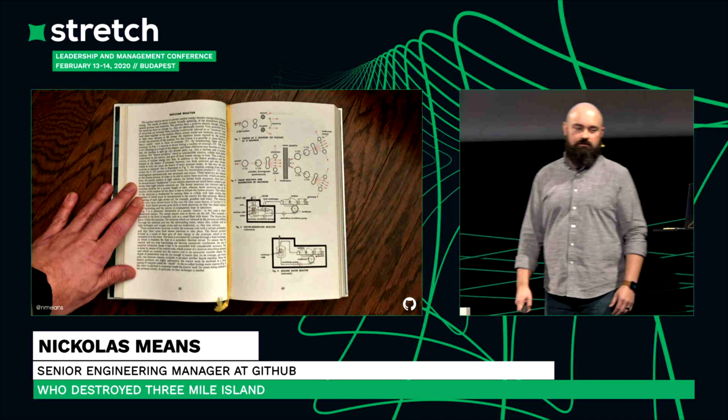I don't look at them very often these days, thanks to the wonders of the internet and Wikipedia, but they still have a treasured place on my bookcase because they're a big part of what made me who I am today. I distinctly remember turning to them when it was all over the news that a new nuclear power station had opened near the town where I grew up when I was a kid. I had no idea how a nuclear reactor made electricity, and I wanted to know. And I think that same diagram I looked at back then is a great place for us to start today.

As it turns out, the basic mechanics of a nuclear power plant really aren't that different from any other steam-driven power plant. There's a heat source that heats up water. Now, in a normal steam power plant, that would be burning coal or burning natural gas or burning oil. But in this case, it's a carefully controlled nuclear chain reaction fueled by uranium. High-pressure water circulating through the reactor carries that heat from the reactor core to a steam generator where it's used to boil water, converting it into steam.

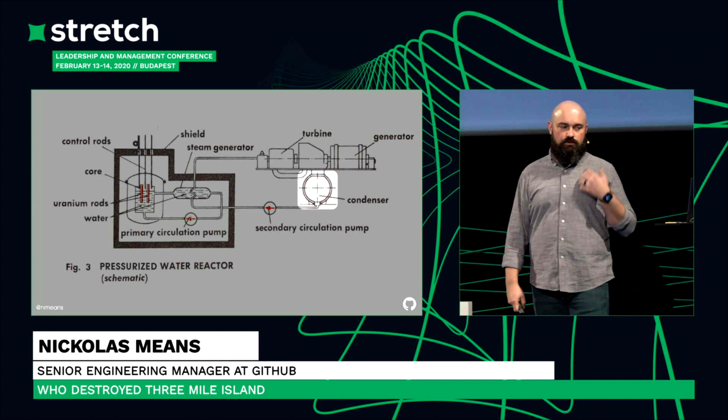And then when water turns to steam, it expands. And that expansion drives a turbine, which is basically a giant fan in a tube. The turbine turns a generator, and that's where you get your electricity. Then the steam is pumped into a condenser where it's turned back into water for another trip around the loop.

Now, there are 2 primary families of nuclear power reactors operating in the United States, the boiling water reactor and the pressurized water reactor. We're looking at a pressurized water reactor because that's the kind that was operating at Three Mile Island the day of the accident. So what is it about this design that makes it a pressurized water reactor? Well, the components that I just walked you through are on 2 separate loops.

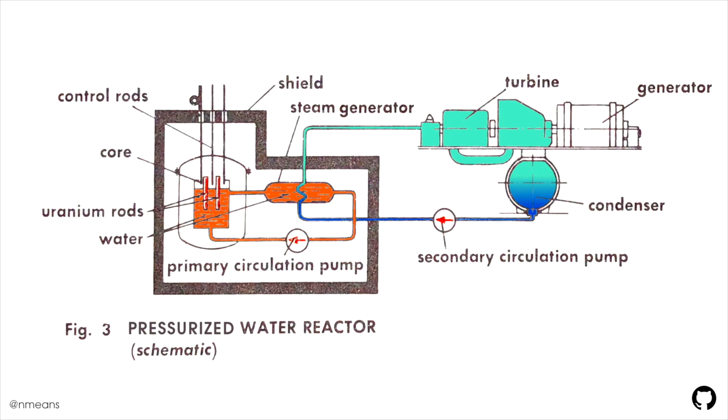The primary loop in orange consists of the water that flows through the reactor vessel, gathering heat, passing through the steam generator and boiling water in the secondary loop, passing that heat off and then going back into the reactor itself. The water in the secondary loop in blue flows from the steam generator, where it boils to steam, through the turbine, through the generator, back through the condenser to turn back into water, and around and around.

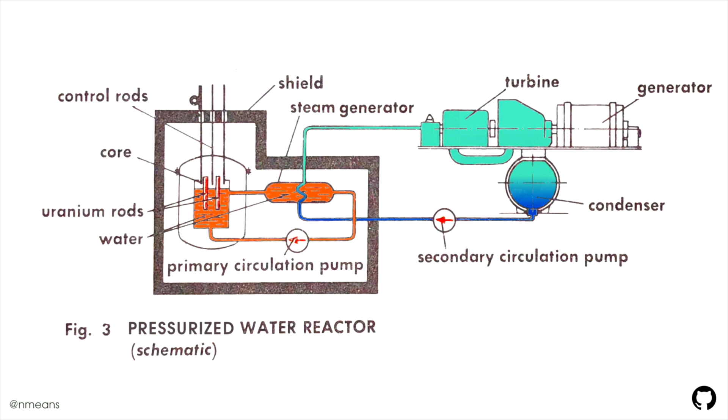And water from the 2 loops never mix. One of the advantages of this is that you have the nuclear portion of the plant really tightly contained in the primary loop, and the secondary loop should never have any exposure to nuclear energy. The thing that makes this design a pressurized water reactor is that the water in the primary coolant loop is held at about 2,000 pounds per square inch.

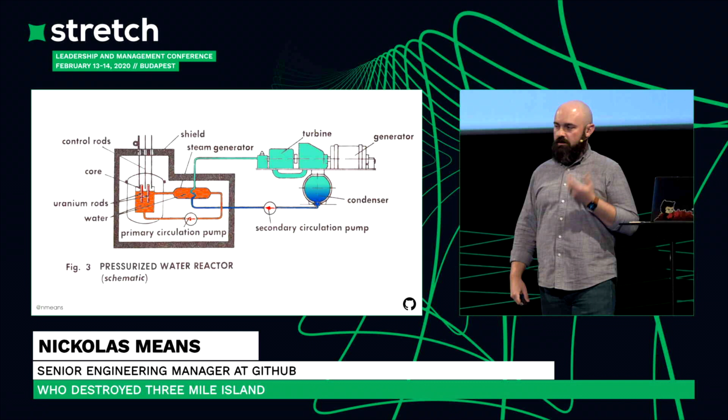A boiling water reactor has to have a very large reactor vessel to allow the water to boil and expand in the reactor vessel, but a reactor vessel of a pressurized water reactor can be much smaller. And the reason for this is that pressurizing water raises the boiling point. And it raises the boiling point high enough that the water in the primary loop will never boil, even at the plant's operating temperature of about 315 degrees Celsius. Or at least it shouldn't.

Which brings us to March 28, 1979. 3 Mile Island Nuclear Generating Station is a 2-unit nuclear power plant in Londonderry Township, Pennsylvania. It's built on a 3-mile-long sandbar, imaginatively named 3 Mile Island, in the Susquehanna River, about 10 miles south of the capital of Pennsylvania, Harrisburg.

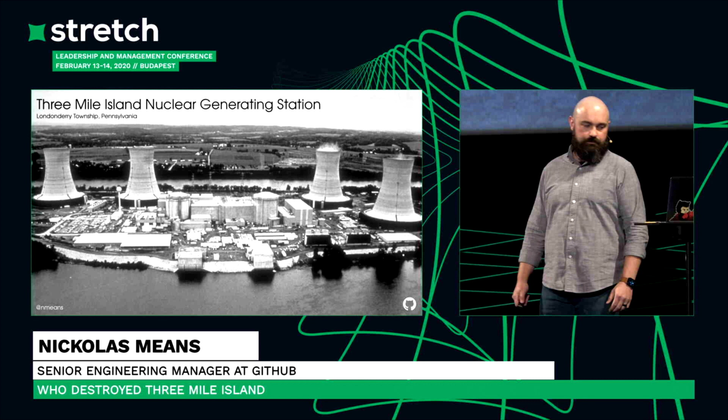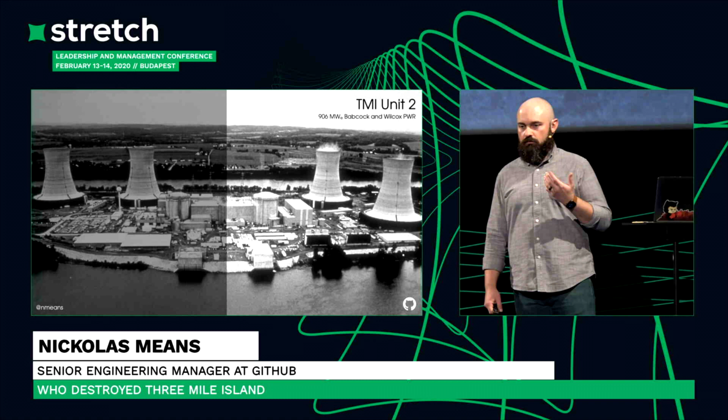Unit 2 is a 906-megawatt electric pressurized water reactor designed by Babcock and Wilcox that went into commercial operation on December 30th, 1978. Now, early in the morning of March 28th, 1979, it's running at 97% capacity, and it has been since it went online. It's running hot, straight, and normal, as they say in the nuclear power industry.

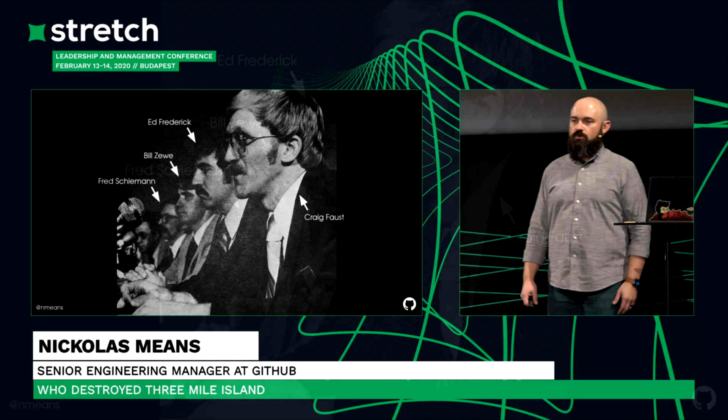Everything at the plant was normal that night. Everything was running exactly as it should, except for a small problem in one of the condensate polishers that the previous shift wasn't able to solve. And these are condensate polishers, obviously not the ones actually from 3 Mile Island. It turns out it's really hard to get a photo of a specific component of a specific nuclear power plant, as you might expect. But this is what they look like. These are condensate polishers. And these are tanks that are filled with resin beads. And 3 Mile Island has 8 of them.

And the purpose of these resin beads is to filter the water coming out of the condenser before it goes back into the steam generator. The steam generators are made up of thousands of tiny tubes, and the tiniest speck of rust or dirt or anything in that coolant loop can clog the steam generator, and eventually you would have to replace the steam generator when it gets clogged enough. So to combat this, they have these condensate polishers. The water flows through them, any impurities in the water stick to these resin beads.

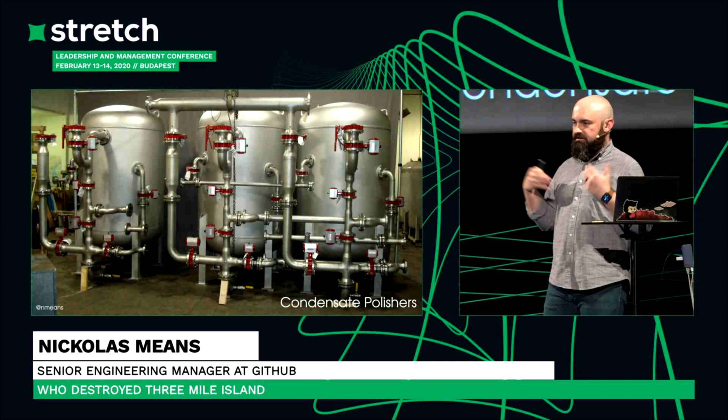The only problem is that the condensate polishers like to get stuck because they like to get clogged because of all of this stuff that they're collecting. And so every so often, one of these condensate polishers would get clogged and they would have to backwash it, essentially reverse the flow of water through the filter to rinse all of that stuff out and into the waste tank.

This particular night, the number 7 tank is completely clogged, and the swing shift had tried to unclog it. They'd used the backwash system. They'd even hooked up an auxiliary air system to try to force this clog through and get this tank moving again. So at 3:59 in the morning, Fred Scheimann is down in the basement of the turbine hall to see how things are coming with this clog.

He's climbed up on the side of the number 7 tank, and he's peering in the viewing port to see if there's any water flowing through it, when things get incredibly silent. Now, he's in a room where millions of gallons of water per hour flow through, so things getting quiet is not a good sign. And he barely jumps free before a water hammer comes through and knocks the feed line from its moorings.

What's happened is over the course of about 10 hours or so, water has leaked back up this pressurized air line through a leaking one-way check valve, because the air supply that they were using to clear this clog in the condensate polishers was the same air supply that controlled the valves for the condensate polishers. And these are fail-safe valves. So when the water finally got up to the manifold that supplied air to all of these valves, it blocked the air supply and all 8 valves shut simultaneously.

Obviously, this is not good. But to help us understand why, here's a schematic of 3 Mile Island Unit 2. Now, I know this looks a whole lot more complicated than the diagram I showed you a minute ago, but it's got all the same parts. So let me take a second to get you oriented. For starters, you can see the primary coolant loop here in orange and the secondary loop in shades of blue.

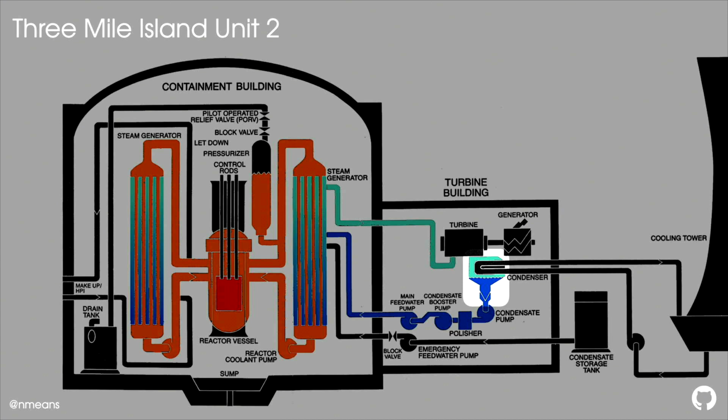Here in the center is the reactor vessel where the nuclear chain reaction creates heat. Next to it are the 2 steam generators where heat from the primary loop boils water in the secondary loop to create steam. This is a 2-loop pressurized water reactor, and so that means it's got 2 redundant steam generators. The steam is then piped to the turbine building to turn the turbine and generator. And then here's the condenser where the steam gets cooled and turns back into water. And then right after the condenser is the condensate polisher. And it's completely blocked.

Now, because the condensate polisher is blocked, there's no water to be pumped through the secondary cooling loop. So the main feed water pumps trip offline. It's now 36 seconds past 4 in the morning, the official start of the accident. 2 seconds after the main feed water pumps trip, the turbine senses it's not going to be getting any more steam, and so the turbine and generator trip offline as well. And this causes the plant's main safeties to open. So all of the steam that's built up in the system gets vented into the night sky at 4 in the morning. And they said you could hear the rumble for miles.

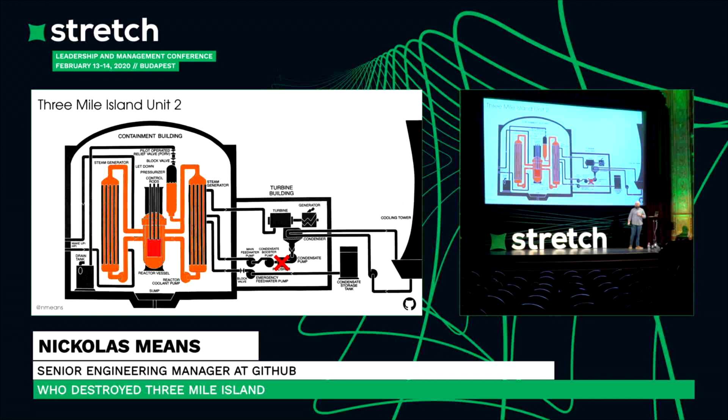In the control room, Ed Frederick and Craig Faust are getting their first indications that something has gone awry. An alarm horn announcing the turbine trip starts going off, and several alarm indicators start to flash. A few seconds after the turbine and generator alarms go off, the pressure in the reactor vessel begins to climb rapidly. But this pressure spike is expected, because without the secondary cooling loop to remove heat, the primary loop climbs in temperature, and when water climbs in temperature, it expands, and this raises the pressure of the primary loop. The good news is, the plant is designed for exactly this situation, and it was taking action to resolve the situation automatically as soon as those first alarms went off.

The reactor's pressure control system is the first to jump into action. Now, there are 2 components to this system, and both of them are important to the accident sequence. The first one we're going to talk about is the pressurizer. Now, the pressurizer in a pressurized nuclear power plant serves a few different functions. First, it regulates system pressure. It's the highest point in a closed system, so raising the pressure of the pressurizer raises the pressure of the whole system. Lowering it lowers the pressure.

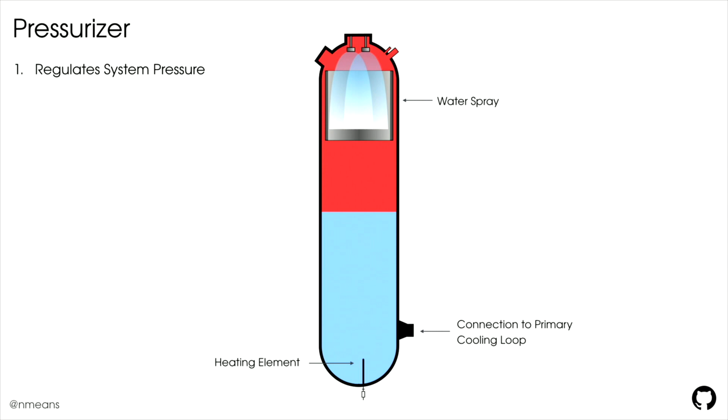Second, it measures the water level. When they designed this plant, they made a decision to save money to not put any water level instrumentation directly in the reactor vessel. And the reason they did this is because it's very expensive to design instrumentation that's going to be accurate in such a high nuclear activity field. And so they said, because we've got this pressurizer sitting here, we can measure the water level in the reactor vessel just by checking the pressurizer. As long as there's water in the pressurizer, there has to be water in the reactor vessel.

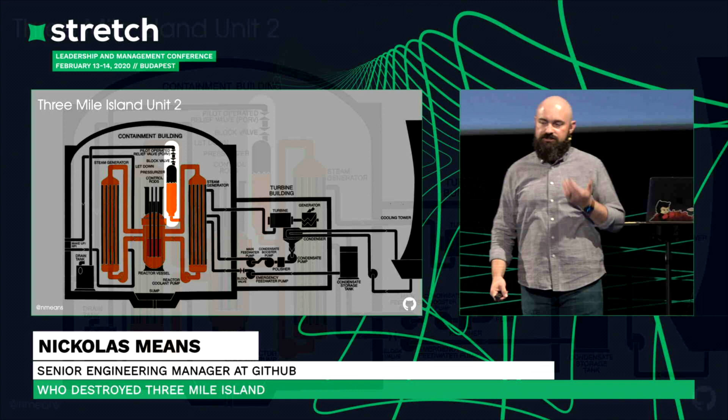And third, because steam is more compressible than liquid water, it serves as a shock absorber. The steam in the top of the pressurizer absorbs any pressure transients in the system, just like the one Unit 2 is experiencing right now. So the steam in the pressurizer absorbs the initial shock, but the pressurizer itself is really only designed for small pressure adjustments. Right now, the primary cooling loop is at 2,250 psi and climbing, about 100 psi higher than it should be.

And it would take the pressurizer several minutes to make this large of an adjustment. So what does the system do about big pressure changes like this one? Well, that's where the pilot-operated relief valve comes in. And if you've ever heard anything at all about Three Mile Island Unit 2, this is the component that you'll remember the name of, because this is the most important component in the accident sequence.

In the event of a big pressure spike, the pilot-operated relief valve will open and release coolant into a drain tank on the containment building floor. This is to immediately and quickly release pressure in the system. The pilot-operated relief valve opens 3 seconds after the turbine and generator trip offline. The reactor control system is doing exactly what it's supposed to keep the reactor in a safe operational state.

A few seconds later, the computer senses that reactor pressure is still continuing to rise despite the pilot-operated relief valve being open, so it takes another defensive action. It scrams the reactor. Now, to understand what a scram is, we have to know a little bit about what's going on in the core of a nuclear reactor, how it generates heat.

So the core of a nuclear reactor is full of uranium, and there are a bunch of neutrons flying around. And every time one of those neutrons hits a uranium atom, it causes it to split. When that uranium atom splits, it releases more neutrons and a copious amount of heat. The neutrons that are released there go and bump into other uranium atoms, and that's why it's a nuclear chain reaction.

Well, the primary means of controlling the intensity of this reaction is a set of cadmium control rods that can be gently raised or lowered into the core of the reactor. And the cadmium control rods absorb some amount of those neutrons that are flying around and slow down the reaction.

A scram is the reactor's emergency stop. Instead of being gradually put into the core of the reactor, the control rods are released from the mechanism that raises and lowers them and are allowed to fall by gravity into the core of the reactor. And once they're all the way in, they stop the chain reaction almost instantly.

The thing you have to know, though, is that even after the scram, the reactor core is still producing some amount of heat. Even though there's no ongoing chain reaction, it's still producing about 6.5% of the heat that it was producing running at full tilt. That descends sharply over the first hour, but it's critical that the core is kept cool for this first hour to avoid damaging the core.

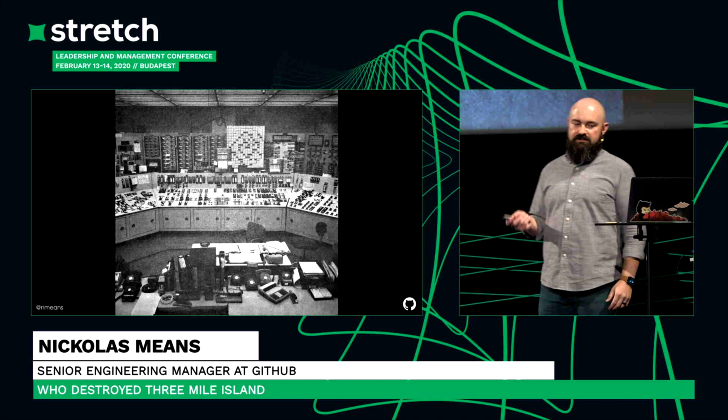A few seconds later, back in the control room, a light on the console turns from red to green to indicate that the pilot-operated relief valve has been signaled to close. Now, at this point, everything feels very much under control. Reactor and turbine trips aren't an everyday occurrence, otherwise the plant couldn't generate electricity. But they're an event that the reactor crew is trained for. They know exactly how to respond to it. This is not out of their expertise.

The alarm horns are blaring, alarm indicators are flashing, but the system is behaving exactly as it's designed. That feeling of control would last exactly 2 minutes. Because 2 minutes later, Ed Frederick and Craig Faust's world is thrown into chaos when the automatic emergency core cooling system activates, specifically the high-pressure injection system. And when it turns on, it begins dumping 1,000 gallons per minute of cold water directly into the reactor core.

Now, this was very unexpected and confusing to Bill Zewe and his crew. The plant had gone from a state they understood to one they very much didn't as soon as high-pressure injection kicked in. And here's why it was so confusing to them. They were watching the pressurizer, and water level in the pressurizer was rising. Seeing the water level in the pressurizer rise told them that there was plenty of water in the system, so they didn't understand why high-pressure injection would need to be adding more water to the reactor core.

And so, Fred Scheimann made the call to turn off the emergency core cooling system, to deactivate high-pressure injection after it had only been running for 2.5 minutes. Had he not, had he left high-pressure injection running, this accident would have been completely avoided. The plant would have been saved. But he didn't. We're now 5 minutes into the accident.

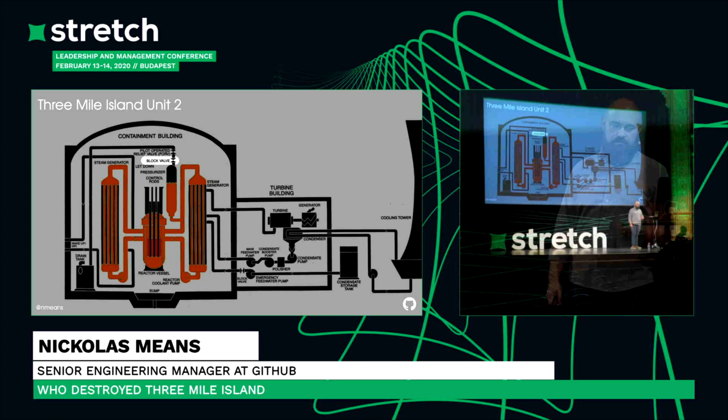Now, had Bill Zewe closed the block valve, had he followed procedure, this incident would have been a minor inconvenience. The accident sequence wouldn't have continued. But he doesn't. He leaves the block valve open. We're now 6 minutes in.

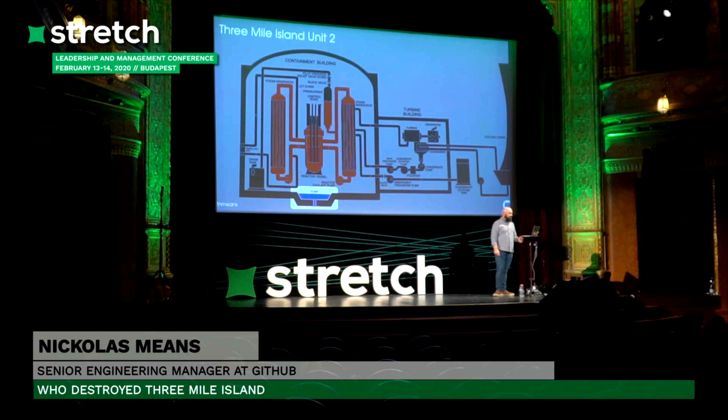5 minutes later, at 4:11 in the morning, another alarm goes off. This one indicates that the sump is filling up. And the sump is a pit in the floor that collects any water that might leak or be vented anywhere in the system. There's potential that any water vented from a nuclear reactor obviously has some nuclear contamination, so they have to check it and clean it before they can dispose of this water.

In this case, what's happening is that so much water has been released from the primary coolant loop that it has filled the drain tank on the floor of the containment building, and the drain tank has started overflowing into the sump. Now, enough water in the sump to fill it up is a very clear indication that the system has a substantial leak, but the operating crew ignore it. The core is in serious trouble at this point, but the operators are not done.

Just after 5 in the morning, the floor of the control room starts to rumble. It's subtle at first, but it quickly becomes impossible to ignore. What's happening is the primary coolant pumps of the reactor are vibrating because they're pushing around steam in addition to the water that they were designed to pump. And that steam is causing significant turbulence and vibration.

Now, they know what their training says to do when this happens. In order to keep the very large, very expensive pumps from vibrating themselves to pieces or causing a coolant leak, they're supposed to shut them down. Now, they hold off doing this as long as they can, but 15 minutes in, Bill Zewe and his crew can stand it no longer, so they shut off the first set of pumps. This helps for a while, but 30 minutes later, the vibration grows so intense that they close the other set.

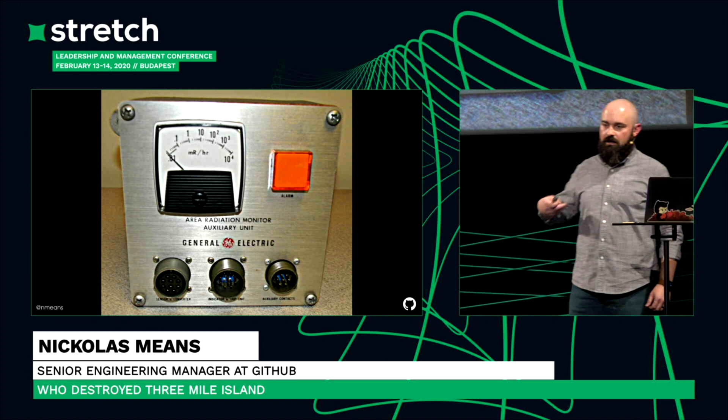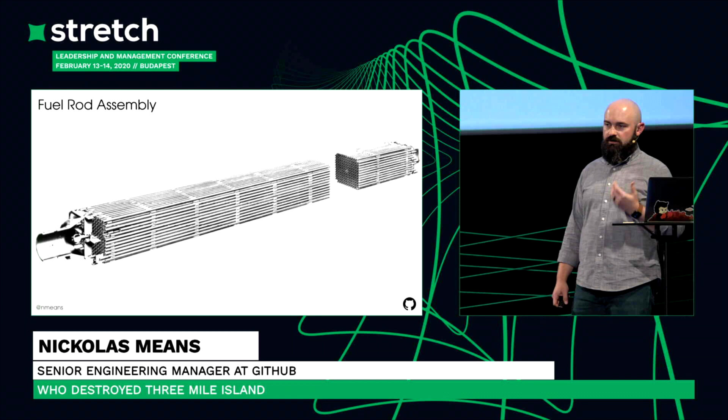First, you need to know that the uranium fuel in the reactor is contained in sealed zirconium rods, preventing radioactive material from being absorbed in the water in the primary coolant loop. So for a radiation alarm to be going off, one or more of the sealed fuel rods has to have been damaged. And second, if a fuel rod has been damaged, it's almost certain that the water level in the reactor vessel has dropped below the top of the core.

Now, about this point, Gary Miller, the site manager of 3 Mile Island, essentially the CEO of the plant, finally makes it in. He hits the ground running in full crisis mode, and almost as soon as he walks in the door, he joins a conference call with Leland Rogers, the site rep for reactor designer Babcock and Wilcox.

It's Leland Rogers' job to know the design of the plant inside and out. He has the schematics memorized. He knows what valve is where. He knows what each pipe does. And as they're talking through what they know about the state of the plant, Rogers says, "They closed the block valve, right?" The block valve. The valve that Bill Zewe decided not to close earlier.

George Kunder, who was on the call from the control room of 3 Mile Island Unit 2, yells to someone else in the control room to ask, "Is the block valve shut?" And the answer comes back, "Yeah, we shut it." And so at 6:22 in the morning, the block valve was finally closed thanks to Leland Rogers' question. The leak in the system sealed.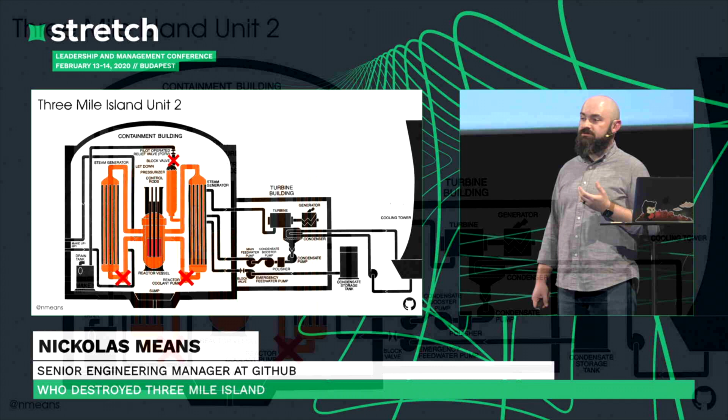Now, this would have been the right thing to do 20 minutes into the accident sequence, but doing it now actually made things worse. With all of the coolant pumps turned off, closing the block valve eliminated the only source of cooling that the poor reactor had left, boiling coolant out of the PORV. It's now a completely closed, completely sealed system. And in this state, the heat in the core intensified very rapidly.

It took 8 minutes for the top of the core to collapse. Subsequent calculations would show that by 7 in the morning, the core was 2/3 uncovered, and temperatures in the hottest part of the core were 4,000 degrees Fahrenheit, about 2,200 degrees Celsius. Hot enough not only to melt the cladding around the fuel, but the uranium in the fuel itself.

At 7:20 in the morning, the radiation alarm in the top of the containment building goes off, indicating a reading of 800 rem per hour. To give you some sense of scale of this, if a 3 Mile Island worker had been standing in an 800 rem per hour radiation field, they would have gotten their full legal yearly dose of radiation exposure in 20 seconds. So this is an intense radiation alarm.

The crew had largely been in denial about core damage after the first radiation alarm went off, but this was the big one. They couldn't ignore this one. Immediately after this alarm, they finally try to turn the high-pressure injection pumps back on. But they turn them off 18 minutes later because they're making the pressurizer level go back up. It wasn't until 8:26 in the morning, after the situation continued to worsen, that they finally re-enabled high-pressure injection for good, largely out of desperation. They weren't sure what else to do.

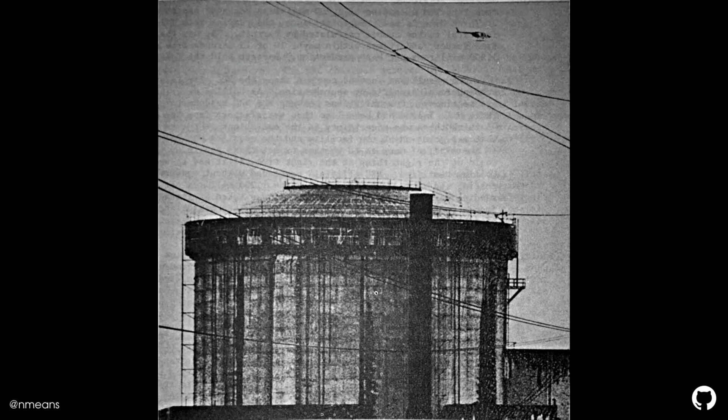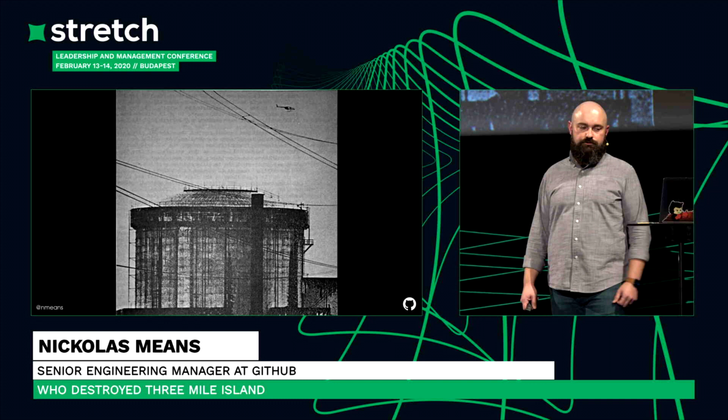It would take until 10:30 in the morning for the core to finally be covered with water again, ending the accident sequence. Over the next few days, there would be continued worry about a nuclear release at the plant, and so they'd keep monitoring the situation on the ground and by flying helicopters with radiation monitors overhead. But the redundant containment designed into the plant did its job, and no significant radiation release would ever occur. There would be public concern about a potential hydrogen explosion in the containment building from hydrogen released as the fuel rod cladding melted, but that turned out to be overblown as well.

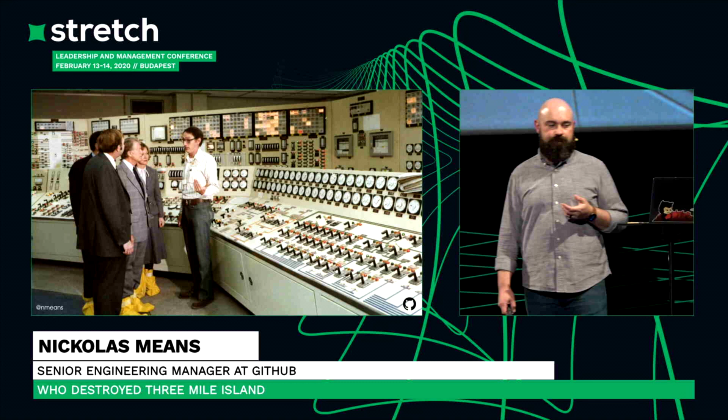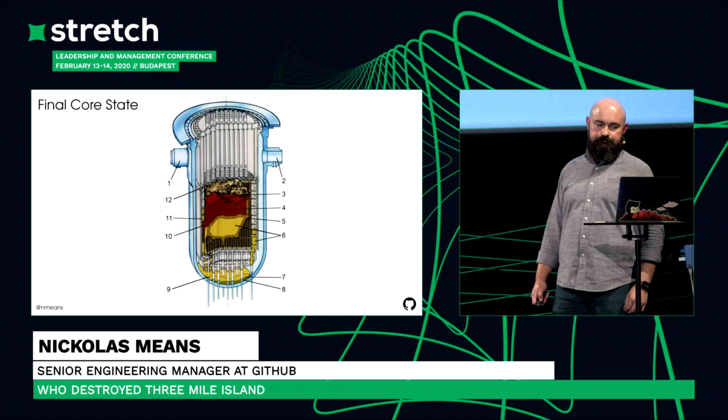3 Mile Island Unit 2 would be written off as a total loss. Around 20 tons of melted uranium ended up in the bottom of the reactor vessel, and another 10 tons blobbed together in the middle of the core. And this is what they found when they began the initial cleanup in 1983. You're looking at severed melted fuel rods that ended up at the bottom of the reactor. The final cost of that initial cleanup was just over $1 billion, and it took 14 years.

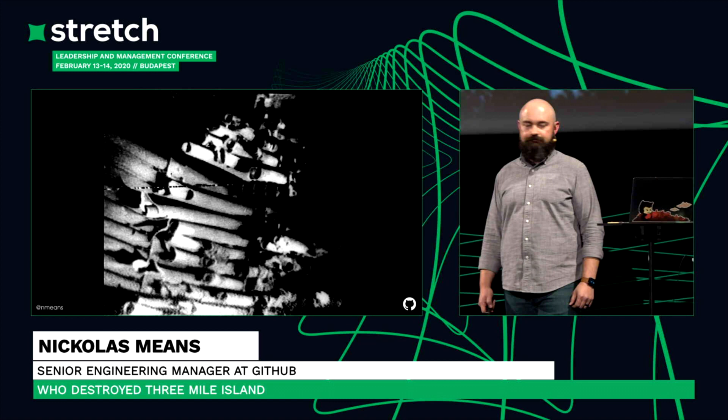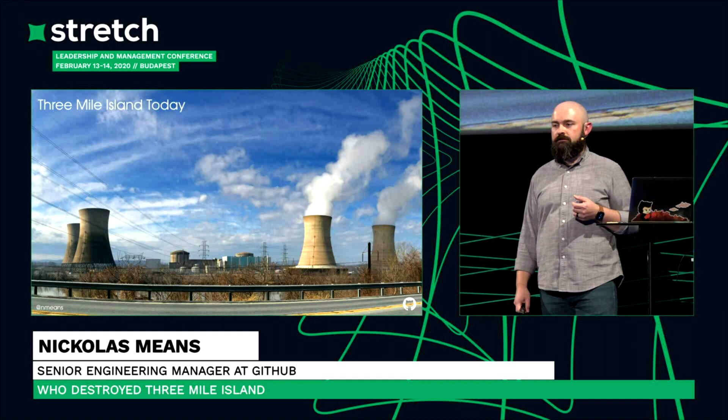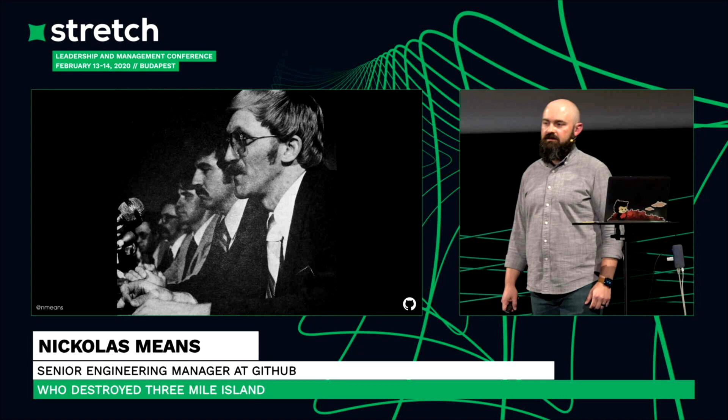Three Mile Island Unit 2 is still standing in the middle of the Susquehanna, defueled but not dismantled. Final cleanup couldn't take place until Unit 1 was shut down and decommissioned, something that finally happened just last year. So what happened? How did these four men miss so many signs along the way that their reactor was in the midst of a loss of coolant accident? That's literally the primary accident type that reactor operators train for, and they missed it.

Why didn't they just leave the emergency core cooling system on when it activated? Why didn't they close the block valve sooner? Were they not adequately trained? Did they not know what they were doing? Maybe we're looking at this the wrong way. Sidney Dekker's wonderful book, The Field Guide to Understanding Human Error, notice the scare quotes there, is an in-depth guide to investigating and understanding what happened when things go wrong.

In it, he introduces the concept of first stories and second stories. And the story I've just told you of Three Mile Island is very much a first story of the Three Mile Island accident. First stories focus on the humans in the story, the decisions they made, and what they should have done differently. A first story will almost always lay the blame for anything that happens at the feet of the humans that made the decisions. There's a couple of problems with this, though, in the form of biases that we all have.

The first is hindsight bias. This is the phenomenon where when you review an event after it's occurred and you know the outcome, you exaggerate your own ability to have predicted and prevented the outcome, sometimes called the I-knew-it-all-along effect. A great example in the Three Mile Island story is, well, all that water in the sump had to be coming from somewhere. I don't know anything about operating a nuclear reactor, but I could have figured out that there was a leak somewhere.

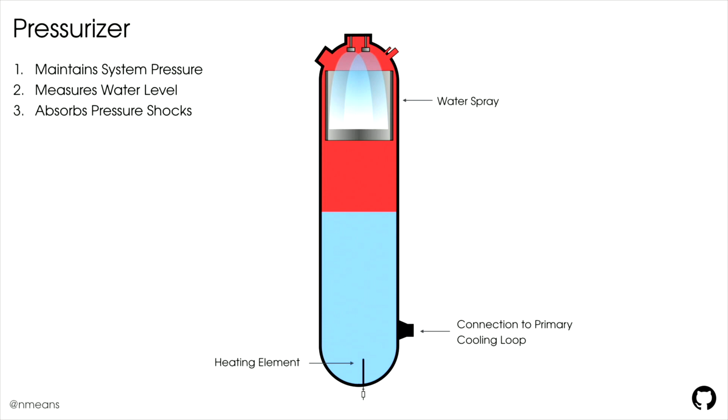In his deposition to the presidential inquiry, Fred Scheimann says that he turned off the emergency core cooling system because it was causing the water level in the pressurizer to rise, and he was afraid that the pressurizer was going to go solid. Now, what does that mean? What does it mean for the pressurizer to go solid? Well, remember that one of the pressurizer's purposes is to absorb pressure shocks in the system via the bubble of steam at the top. Letting the pressurizer go solid is to allow the pressurizer to fill all the way up with water, eliminating its shock-absorbing capability.

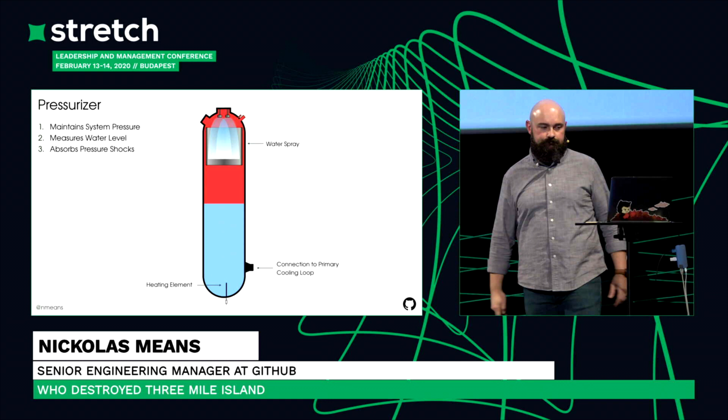So obviously, he's concerned about losing that shock-absorbing capability, but what about the reactor core that's melting down? Why would he be concerned about shock absorption when there's a bigger problem happening? And the answer to that question goes all the way back to Admiral Hyman Rickover and the nuclear navy. Because it turns out that Bill Zewe, Fred Scheimann, Ed Frederick, and Craig Faust were all trained in the operation of nuclear reactors by the US Navy. And the naval reactor training created by Admiral Rickover had drilled into these men that keeping the pressurizer from going solid was the single most important thing for a reactor operator to focus on.

And in a 60s-era submarine, that made a lot of sense. A 60s-era submarine reactor produced 12 megawatts of thermal energy. Three Mile Island Unit 2, in order to produce its 906 megawatts of electricity, has to produce 2,841 megawatts of thermal energy. This is because of inefficiencies and loss in the system.

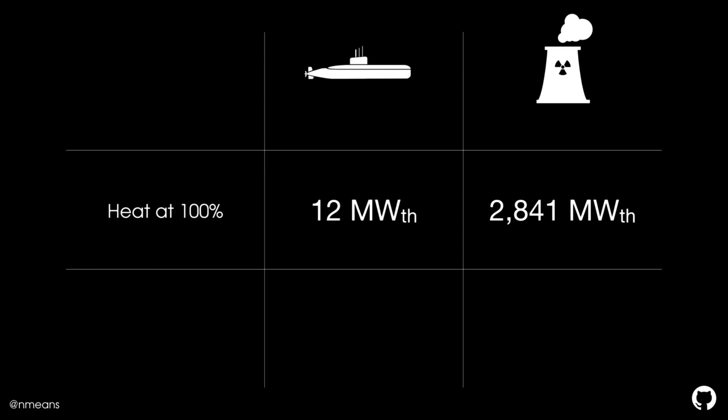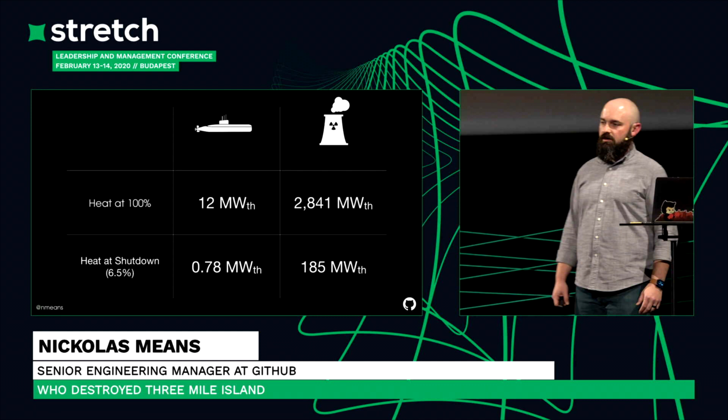Like I mentioned earlier, when you scram a reactor, the primary heat production stops immediately, but there's still decay heat being produced. And it takes a while for that decay heat to go away. In a submarine reactor, that energy is trivial, around 780 kilowatts. Not enough to cause any problems, not enough to melt the fuel. A power reactor, however, is still producing 185 megawatts of heat at shutdown, more than enough to melt the fuel.

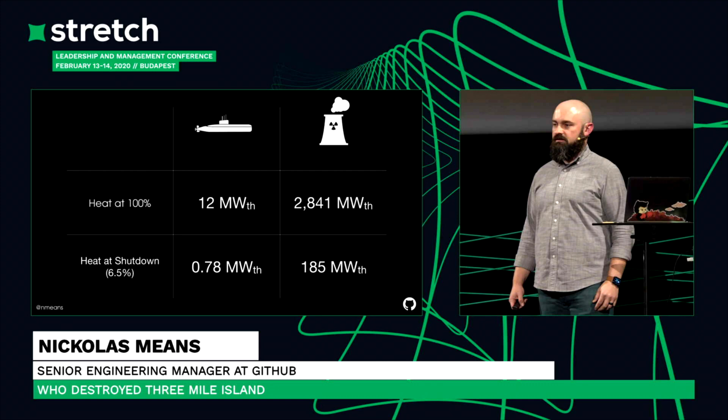In a submarine, a water hammer with no shock absorption is literally the worst case scenario because it can result in a loss of propulsion and because of that, a lost ship. Carrying that mentality into the operation of a power reactor where far worse things are possible turns out to be a huge systemic vulnerability, one that was completely unrealized before Three Mile Island. Nobody realized how much U.S. reactor operators were relying on their nuclear training from the Navy, and the knowledge and assumptions that they'd carried over from their naval training.

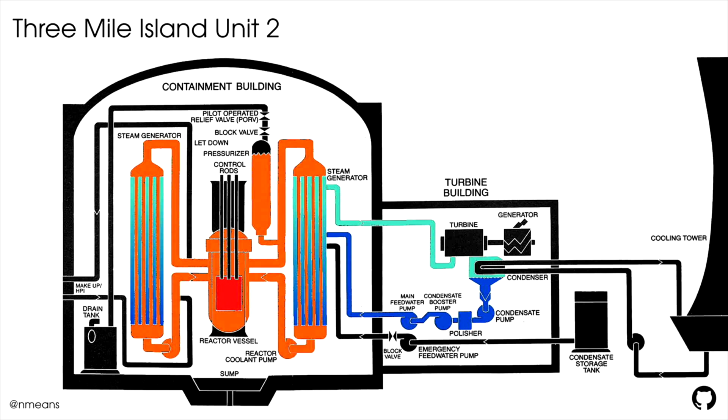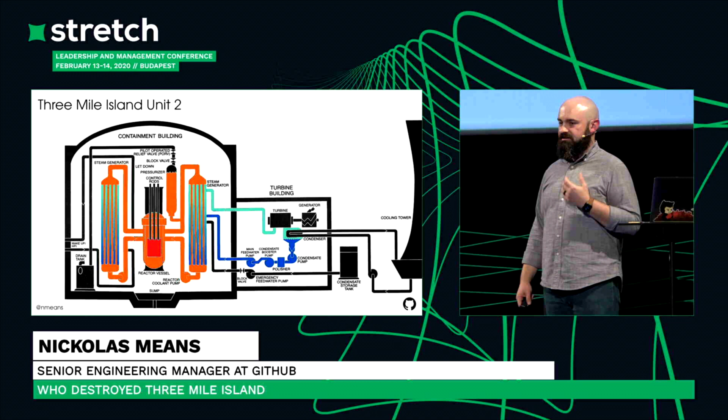And so Fred Scheimann, faced with a rising pressurizer, inferred that the system was clearly full of water already, and allowing the emergency core cooling system to continue high-pressure injection would overfill the system, risking a full pressurizer. And so in an effort to keep the reactor safe, he turned off high-pressure injection. It's a decision that makes perfect sense when you consider where he was coming from.

Let's look at another decision. Why did Bill Zewe not close the block valve when he first checked the pilot-operated relief valve? If you remember, the reported outlet temperature was 228 degrees Fahrenheit, and procedures called for the block valve to be closed for any reading over 200 degrees. But it turns out that the pilot-operated relief valve at Three Mile Island Unit 2 had been leaking, ever so slightly, since the day the reactor went into operation.

And they had made the decision, because it was a slight leak and because it was on the nuclear side of the plant, not on the secondary loop, that they wouldn't fix it until the first refueling shutdown several years in the future. That leak led to regularly observed temperatures over 200 degrees Fahrenheit at the pilot-operated relief valve.

And so in the split second that Bill Zewe had to make that decision, he reasoned that given the baseline temperature was always over 200 degrees Fahrenheit, as far as he could remember, and that the pilot-operated relief valve had recently been opened, venting very hot water, 228 degrees Fahrenheit wasn't all that unreasonable of a temperature.

What's more, Bill Zewe was looking at a clear indicator on the control panel of the pilot-operated relief valve position. It had turned red when the valve opened and green again when the valve closed. The only problem with that is that that indicator wasn't actually an indicator of valve position. It was an indicator of computer commands. The light turning red indicated that the computer had commanded the valve to open, turning green that the computer had commanded the valve to close.

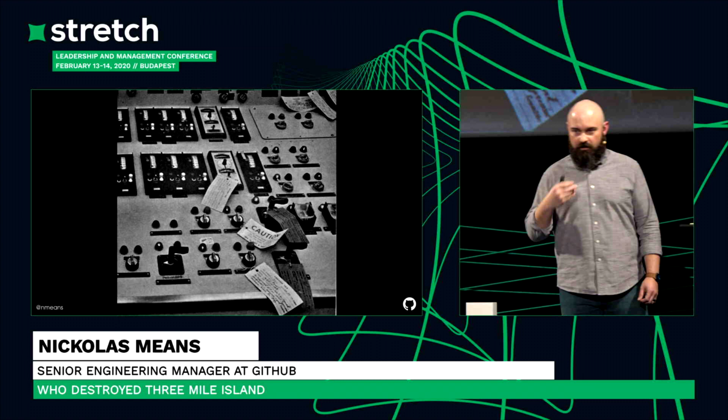There was no indication on the control panel of the actual position of the valve. The only way to know was to infer from the temperature of the outlet. And so Bill Zewe, assimilating all the information he had at his disposal and considering the almost full pressurizer, left the block valve open so that the pilot-operated relief valve could still respond in case there was another significant pressure spike. He left the block valve open to try to keep the reactor safe. Again, makes perfect sense when you consider where he was working from.

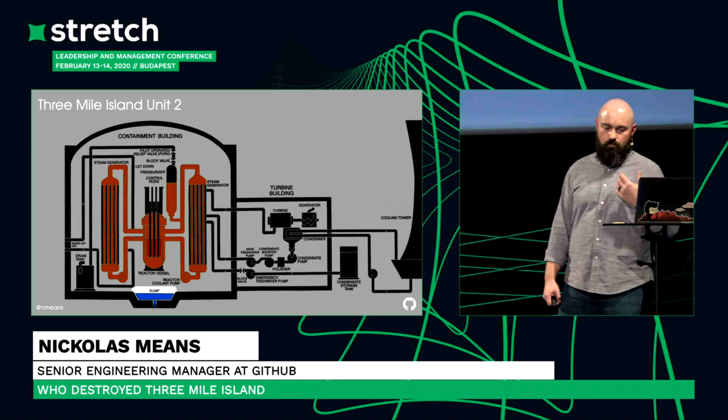One more, and this one's a quick one. Why did the crew not respond when the sump alarm went off? How could they not know that they had a coolant leak? It seems obvious, right?

There's a few problems with these lights. Number one, they're noisy. There's 600 of them in total. And when the reactor is operating perfectly normally, when everything's going just fine, 40 to 50 of these lights will be lit up. Does that sound like anybody's exception monitoring system? Second, there's no rhyme or reason to their placement. One of the most important alarm lights, the alarm for coolant pressure, is right next to a light that indicates that an elevator is stuck in the containment building.

And third, they don't indicate chronology. You can't tell by looking at them the order that they went off or what's new since the last time you looked at the lights. That one they actually had an answer for. They had an alarm printer. Every time an alarm goes off, it gets sent to the printer, so there's a log of alarms. The only problem is that that printer runs on a 300 baud serial connection.

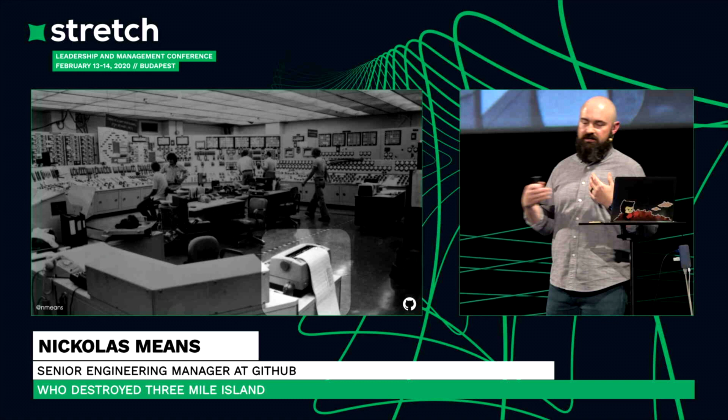That's really, really slow. Less than an hour into the accident, more than 100 alarm lights are illuminated. Exponentially more alarms than that have actually gone off. There have been multiple alarms for the same lights. And it would take this humble little printer 2.5 hours to get caught up on printing alarms. There is no way that the operators can comprehend the flood of information that's being directed at them. And so they just miss the sump alarm. They never see it.

The operating crew at Three Mile Island looks quite a bit different now that we've dug into the second stories behind their decisions, right? So how do we implement this idea of first and second stories in our own teams? Well, Dr. Dekker has some helpful advice for us. First, when we're trying to figure out why something went wrong, we agree on a baseline rule that human error is never the cause. Human error is always a symptom of some other underlying systemic problem or problems. So blaming an issue on human error just keeps us from figuring out what actually went wrong. A good way of helping to frame the conversation in these terms is to ask what is responsible for an outcome, not whose fault it is.

Second, understand why it made sense. The people on your team don't come to work intending to do a bad job. Chances are, when they make a decision that you don't understand or they miss something obvious, there's a good reason they did what they did. Take the time to understand why it made sense, because if it made sense to them, it'll make sense to somebody else later.

And finally, and probably most importantly, seek forward accountability, not backwards. Our instinct when things go wrong is often to find who is responsible and punish them. When we try to move our organizations away from blame and towards finding second stories, one of the most common objections is, but what about holding people accountable? If you've rolled out blameless postmortems in your organization, you've almost certainly run into this objection. But one of the reasons that blameless postmortems are so important is that removing punishment actually frees people up to candidly share their stories of what happened so you can learn from them instead of sweeping them under the rug.